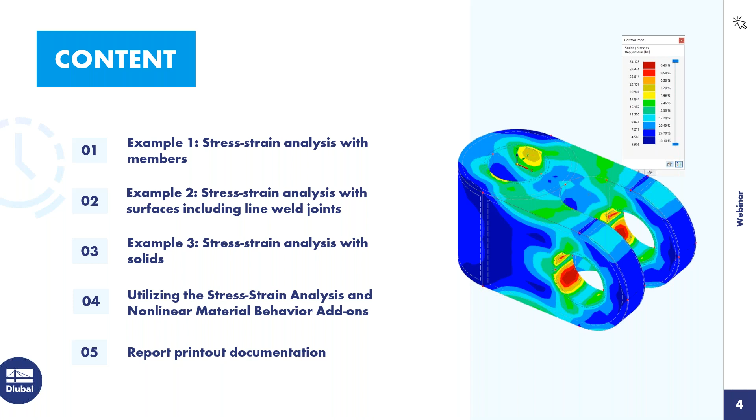Beginning within our main program RFEM here, I've already created the first model, and you'll notice I gave it a model name. The type of model is set to 3D, and under the add-ons, this is where we want to activate the stress strain analysis add-on. These are all the multiple add-ons that we could purchase with our RFEM license, so we'll be starting with this one for today.

Once we've activated that, we can see our 1D member elements modeled here in our graphical window. If I turn this into wireframe view, these are all going to be one-dimensional elements, and this is some type of facade wall.

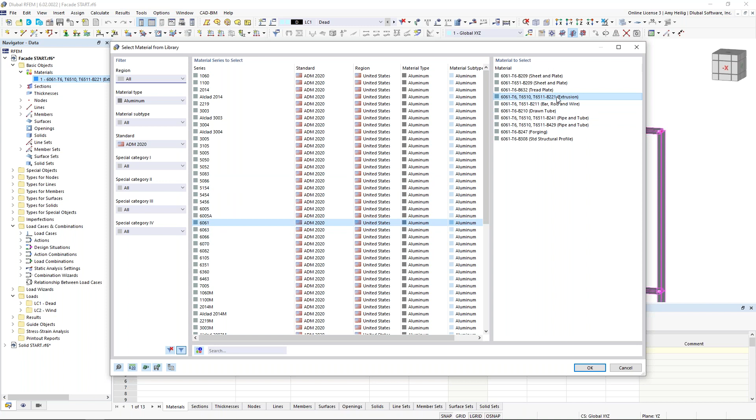I have defined the material here for all of these members as 6061 T6, and this comes directly from the ADM standard. If we take a look at our material database, notice I use my filters on the left to filter to the ADM, and under the 6061 category, I chose this particular material for extrusions.

If we take a look at the cross sections defined within this model, we have a couple of them here. These are just basic parametric sections where I could input the dimensions, and the program will automatically calculate the cross-section values for me. Same concept for this second cross-section, notice I just rotated it 90 degrees here.

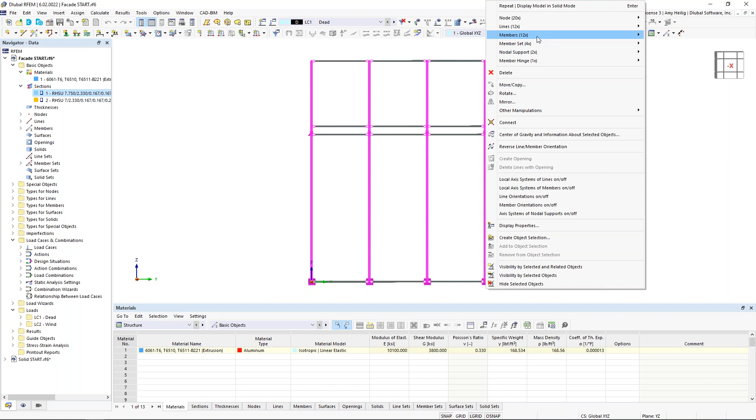So I have modeled all of these members, and the program has gone ahead and broken some of these apart here. Perhaps we'd like to design these columns as one continuous member. Even though those members are broken apart, it's not a problem, as we can create what's called member sets. If we highlight all of these single elements here, and we'd really like to design them as one continuous member, we can always right click, and under the member option, we have what's called create member set.

The program will automatically group all of those together, and now we see them available in our navigator on the left. I also want to go back to our base data here by right-clicking on the model name, and under the settings and options, I'm going to turn on the member representative and the member set representative. Notice we have a couple additional tabs up here at the top.

What the program can do is group together members that have similar materials, cross-sections, lengths, as well as several other options. Once we activate these member representatives, we also see them available over here on the left-hand side. If I turn this into wireframe view, we'll also see those red and blue symbols here, kind of grouping those similar members together.

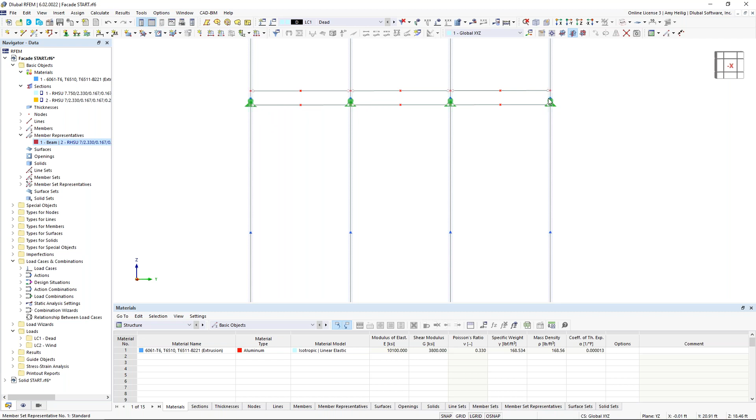This will come into play later on with our stress design. I've also applied a couple of supports here. You'll notice the nodal supports applied at the center line of these small segments, and then we have a sliding nodal support down here at the bottom.

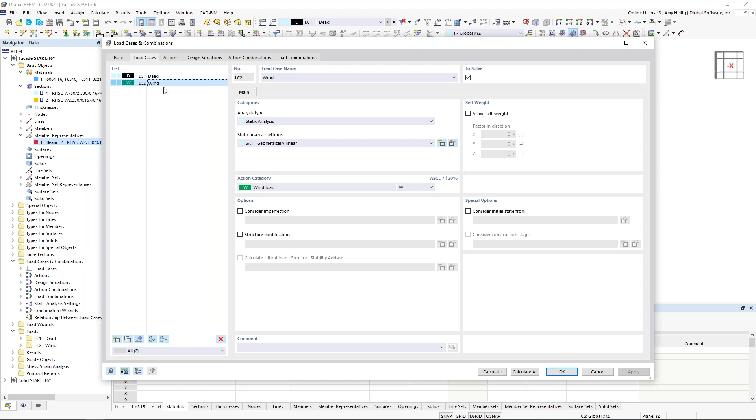Now moving on to the loads. I have created two basic load cases for our facade wall here: a basic dead load, with self-weight active, and a wind load case. Once those load cases are created within this dialog box, we would apply the loads to the structure. For the sake of time, I went ahead and did that.

If we turn on our loads for dead load, you can see that this facade wall is likely going to be supporting some type of glass panel. So I wanted to attach the glass panel and represent them as basic point loads along these horizontal members. If we double click on these loads, you'll see we can set the load type to force, but the load distribution is set to concentrated, where I can set the number of point loads along the member length. I set the magnitude here at -0.8 kips.

In the global Z direction, we have 2 point loads along the member length set at a distance of 10% of the member length, then an additional 80% of the member length. Not only that, but with these glass panels that we're trying to represent, perhaps they're not necessarily applied right at the center of these members.

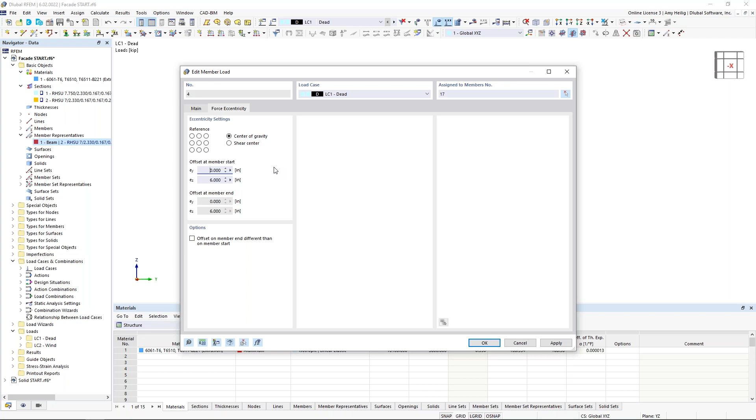So we have the ability here to turn on the eccentricity of these point loads, and now we get an additional tab where we can apply an eccentricity. I've set this to 6 inches in the local Z direction of the member based off the center of gravity, so now we have an additional torsional moment applied to these members based on these glass panels being attached there. You can also modify this to the shear center as well.

I've applied these point loads not only to the bottom horizontal members, but you can see them applied up here, to the upper members as well.

Moving on to the wind load, we can see that wind load generated here as a lateral load, and I took advantage of our load wizard over here in the project navigator, what's called the member loads from area load. If we take a look at this applied load, I've set the load direction in the global X direction based on the global axes. The load magnitude is set at 0.02 kips per square foot.

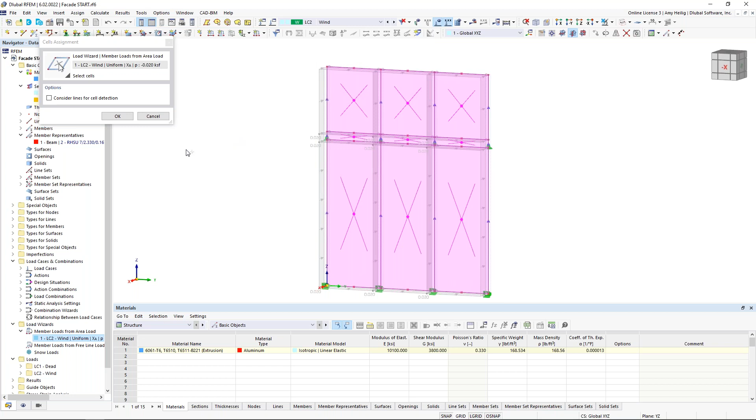Under the second tab, we have two options: either we could use the ability to select the corner points of the area load, or we can select the cells graphically, so the program can detect these closed cells between members. We can graphically select them with our selection options, and when we do this, all of those cells are automatically populated within this table. So what we'll see here is that applied lateral area load based on a closed area for these members, shown graphically.

We can always right click on this load to display separately. Essentially this is going to be the member loads that are applied based on the tributary area of each one of these members. But we can always right click here to uncheck this display separately, for a little bit of a cleaner look there.

Now that the loads have been applied to the structure, let's go back into our load cases and combinations, and we're going to back up a step under this base data. So currently I'm generating the load combinations automatically according to the ASCE 7, but you can see here we can select the NBC, Eurocode, and many other international standards. When this option is checked, those load combinations will be automatically generated according to the standard.

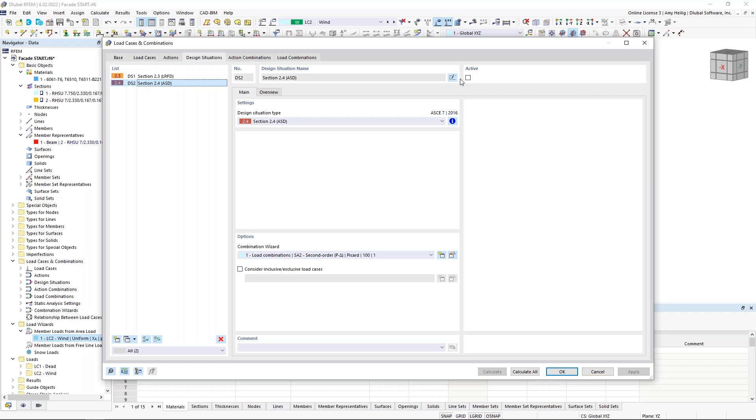The design situations are really important. We have two design situations automatically created: LRFD for our factored load combinations and ASD for our unfactored load combinations. Notice we activate these design situations for the add-ons. The add-on that we turn on, remember, was the stress strain analysis, so we'll be using this design situation once we get into that add-on for the design portion. Now, if I'm not so interested in my unfactored load combinations, let's say serviceability is not really a concern, we can delete this design situation, or we can simply deactivate it up here in the upper right-hand corner.

And under the last tab, the load combinations, this is where we see the load combinations individually listed out based on the ASCE 7, and only according to the load cases we have defined, that dead load and that wind load.

So now that the load combinations as well as the design situations are set, what we would like to move on to is the stress strain design configuration.

So we're technically ready to run the analysis, but the huge advantage of RFEM 6 is the integration of these design add-ons so that we can run one continuous workflow.

So what I'd like to do is right click on my folder here to collapse all these folders, so maybe it's not so overwhelming. And because we have activated that stress strain analysis add-on, we now see an additional folder over here on the left. Included in this list is what's called the member configurations.

So we'll double click on this to take a look at the default options. Notice that these are all of the available stresses that we can calculate for these members, and that includes normal stresses based on axial loads, based on bending loads. The list is rather long, but we've taken the liberty here to suggest a few of these stresses that you might be most interested in.

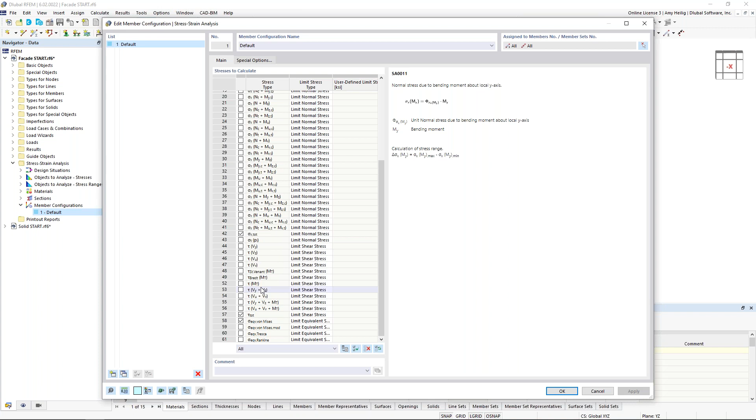For our example today, let us assume that we really are only interested in designing the von Mises stresses. So when I take a look at this, I make sure my checkbox is on, and notice for all these stresses, the equations along with the variables are listed over here on the right. And in the second column here is where we set the limit stress type.

Now currently it's set to the limit equivalent stress. What this means is the program is going to refer to that ADM material to determine what the limiting stress value is. Now, alternatively, we can set this to user defined, and I can simply type in the user defined limit in this third column. But let us go ahead and leave this for now set at the limit equivalent stress.

The other nice thing about these configurations is that we can give this one a name. We'll call it von Mises. We don't necessarily have to apply the same configuration to every single member in the model. So if I'm interested in applying the von Mises here only to my vertical members, I can graphically select them here, and once I click OK, we'll see those members populated in the upper right-hand corner.

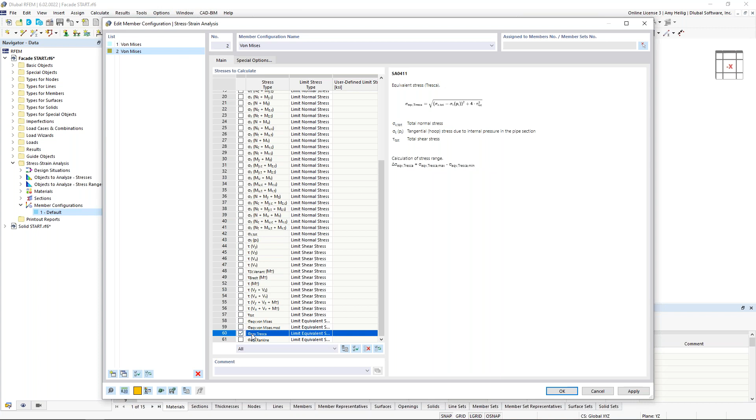Now I can make a copy of this configuration, and instead of von Mises, let us turn on the equivalent stresses based on the Tresca hypothesis theory. We see the relevant equation here that will be used. We can give this one a name, called Tresca, and we're going to assign it to all of our horizontal members. So we can select these members one by one here using our selection box, and once we're done with this, we click OK and we see the members populated in the upper right-hand corner.

So we are now ready to run our calculation. We can go to calculate, calculate all. The program will generate the mesh, it will move through the load cases and combinations for the static analysis, and then it will move through the stress design.

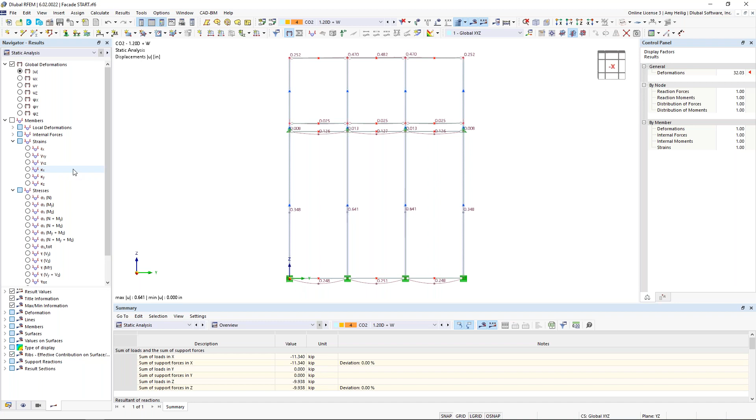Once this calculation is done running, you'll notice that we can view any one of these load combinations, for example, from our drop-down menu. Over on the left, we have both the static analysis and the stress strain analysis. So if we start off with the static analysis, we can view information like our global deformations, our support reactions, but of course we're interested in here all of the available stresses as well. We can view these stresses on the member, including normal stresses, shear stresses, and of course the von Mises stresses. So again, this is the static portion of the analysis.

But we're also interested in the stress design based on those configurations that we've just set. So what we can do here is jump to the stress strain analysis within this dropdown. And if we take a look at our table results, you'll notice that we actually get an error for each one of these stress ratios. It just simply says non-designable.

So we'd like to take a look at this in a little bit more detail, and I'm going to go into my result details here. This is going to give me a little bit more information. It tells me no limiting stress defined, please correct in the member configurations. Well, if we refer back to our aluminum material, and I'll visit this here under the basic objects, the materials, we take a look.

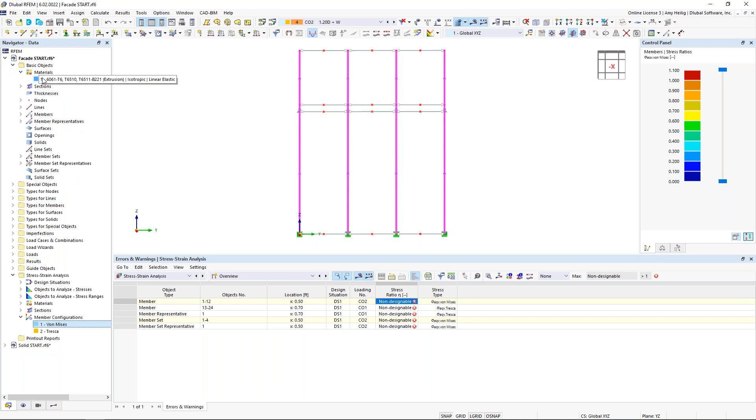You'll notice that the material values have many different values set here under the strengths, depending on if the member is in tension, compression, or shear, and so on. Aluminum materials are a little bit different than, say, steel. A36, for example, has a very clear yield strength of 36 KSI, but aluminum ADM materials do not, so the program simply doesn't know which one of these to refer to.

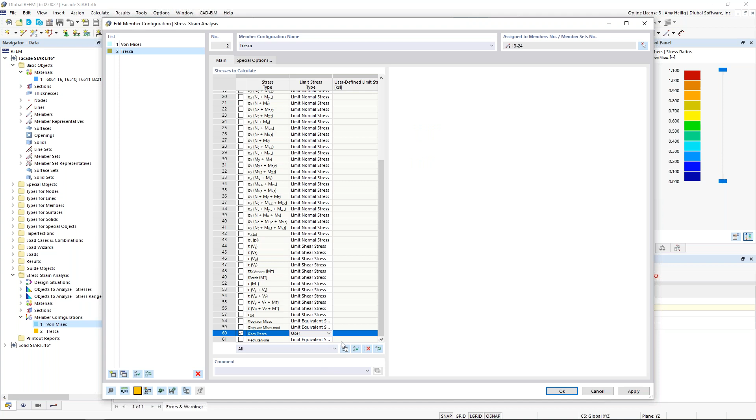We can easily fix that here by going back to our member configurations. Under our von Mises configuration, instead of using the limit equivalent stress, perhaps we set this to user defined instead, and we pick one of those strength values for that ADM material, such as 35 KSI. Under the Tresca, we need to do the same thing, so we'll set this to user defined and also set this to 35 KSI. We click OK.

If we revisit here our stress strain analysis, we see our input data and the design situation. Remember that LRFD design situation, and we're designing all of our members. So our static analysis remains the same here, but we do need to rerun the design portion according to this add-on.

So we'll go ahead and initiate that, and now we should see some results available in our table format. We can take a look within this dropdown at the stresses on members. Sure enough, we have our column here of existing stresses for each of these members, but we also have the limiting stress of that 35 KSI, and ultimately we're getting a stress design ratio.

We also can view these stresses by member set. Remember those continuous members that we created for these vertical columns - we're also going to see our stress design ratios for each one of these continuous members. If you also remember, we activated the member representative, and we're only getting one value here. We can think of this more so as an envelope solution, grouping together all of those horizontal members, giving one value here for the existing stress, the limiting stress, and the stress design ratio. Same concept for the member set representatives.

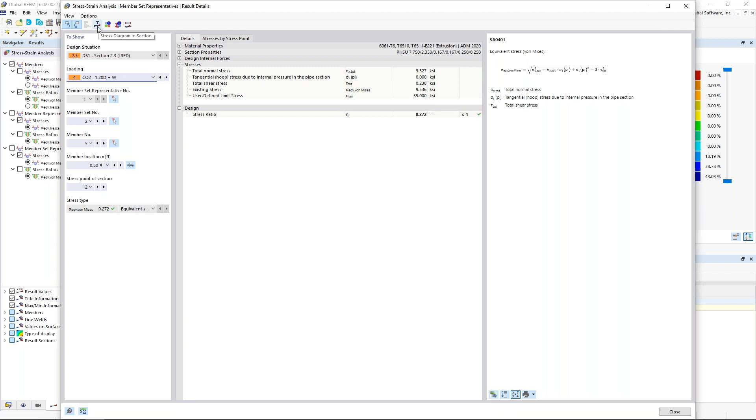The other thing we can view for any one of these results in our table format is to take a look back at these result details. If you remember, this is where we got more information about our error message, but now that it solves, what we actually see is the stress ratio. We see that same equation given to us on how we're going to calculate, for example, the von Mises stresses. We see all of our variables given. And what else is nice within these details is we can turn on the stress diagram within this section.

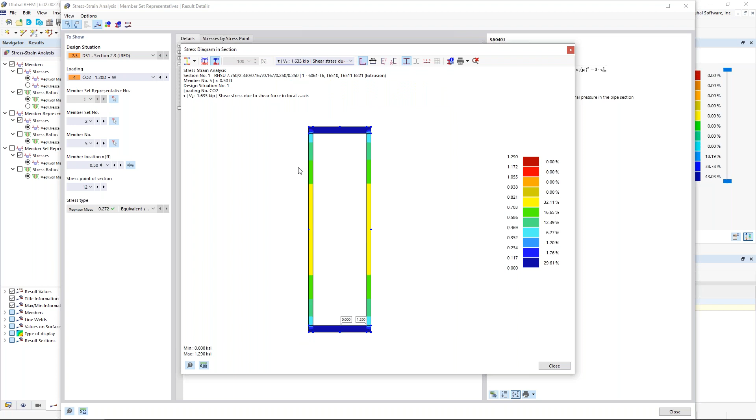So currently we're looking at that cross section at the location of x equals 0.5 feet along the member length, and we're currently viewing those von Mises stresses graphically here, but we can use the dropdown to choose the third option, stresses, as well. The stresses option is going to allow me to view all of the normal stresses. Perhaps I want to take a look at the shear stresses. We can add this information to our printout report and just get a little bit more information about what's going on for this particular section at this X location.

Now, of course, in addition to the table format, we have all of our information shown graphically here under the stress strain analysis. For example, we can view the stress design ratios that are currently turned on according to Tresca, or perhaps we want to turn on the stress ratios according to the von Mises.

Okay, so that will wrap up this first example with one-dimensional members. For our second example, I'm actually going to create a new file because we will model this one from scratch. Pretty basic structure, so we'll give this the model name of base plate, whatever that may be, and the type of model will be set to 3D. Under the add-ons, again, we want to activate the stress strain analysis, and we're also going to activate for this second example the nonlinear material behavior.

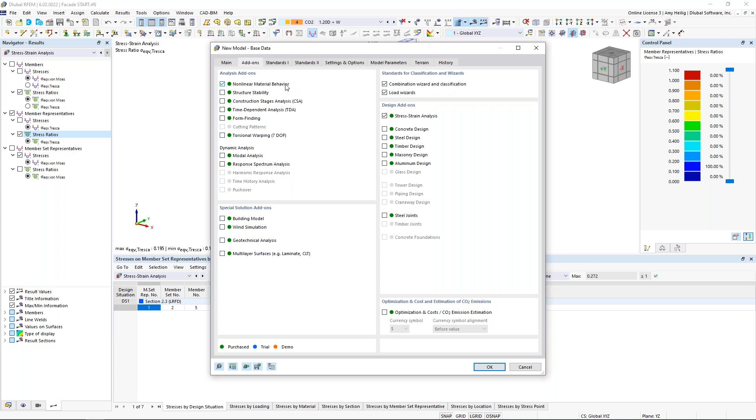So we'll get into this a little bit later on, and we can click OK. Now we're presented with a brand new model here within RFEM.

The first thing I'd like to do is right click on my grid settings down at the bottom. Currently everything is based on a spacing of 1 foot, so I'm going to go into my units and change the length unit from feet to inches, since we're working at a much smaller scale. I click OK, and instead of grid point spacing at every 12 inches, I'll set this to every 1 inch, then click OK.

So we zoom in here, and now we see our much smaller drawing grid. We'll begin by drawing a new surface within our toolbar up here, and we'll choose rectangle via center.

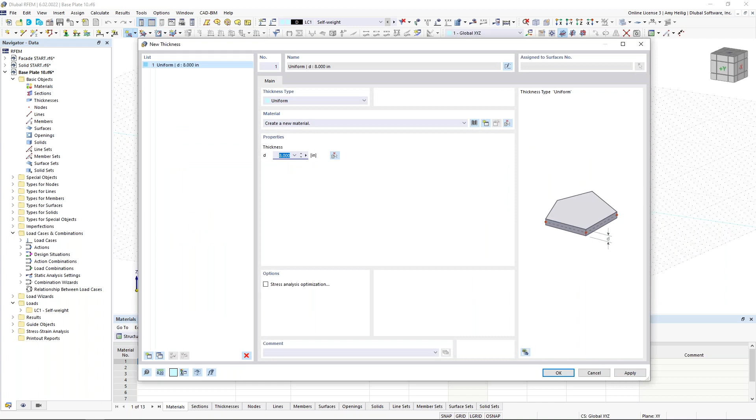We need to generate a new thickness and material for this surface, so we create a new definition type here. The thickness is going to be set at 0.5 inches, and we need to create a new material from our material database. We can use our filters on the left to choose steel, the AISC 360 for example, and choose A36 for plates. Now that this thickness and material have been defined, I can click OK through these dialog boxes.

I will snap at the origin here, and make my second click at a point of 10 inches in both the X and Y directions, and we have our first 2D surface element generated here.

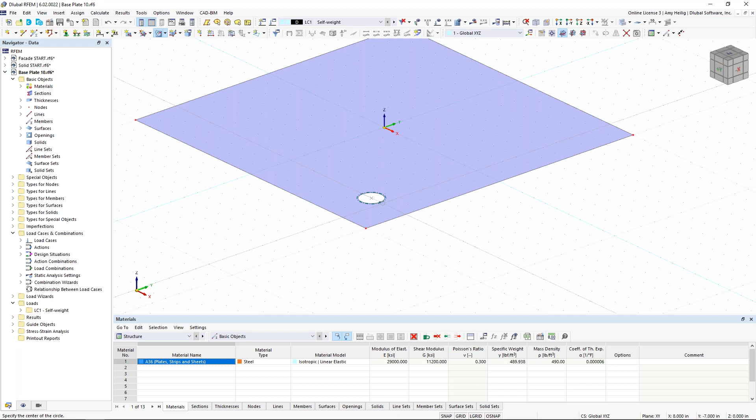Now I'd like to add in some openings. This will essentially be our base plate, and we add the openings to represent where those bolts will connect the base plate to the underside of the surface. We can do this by creating a new opening and choosing the circle option, then simply clicking directly on my drawing grid and setting my radius by typing it in, such as 0.75 inches. I hit enter, and now we see that opening generated here on the surface.

I'm going to represent my bolt elements with a new nodal support, so I create a node by directly clicking right at the center of that opening. I right click to exit, and we're going to create a new nodal support, generating a new nodal support definition here as well. I'd like to restrain translation in the global X, Y, and Z directions, but release rotation about those global X, Y, Z axes. So this pin nodal support is going to represent that bolt taking over the tension forces. I click OK once again.

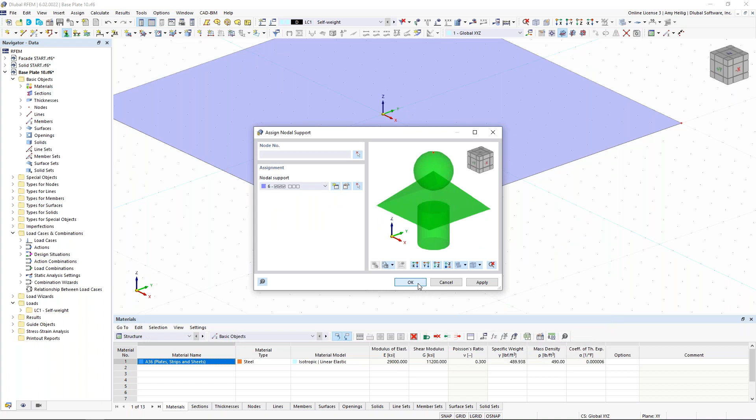I'll snap here to that newly generated node, right click, and we can even right click on the display of this nodal support to decrease its size to something much smaller, so it fits in with the size of our base plate here.

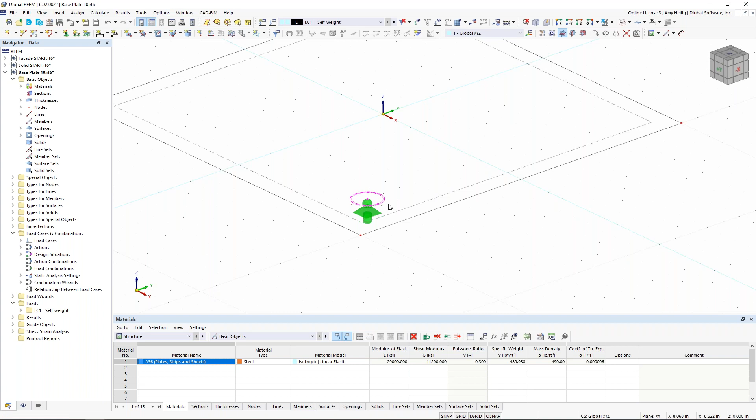I'll convert this to wireframe view and highlight all of these elements that I just generated. What I want to do here is make a copy of the opening and the nodal support, so we'll go to our rotate copy tool. We'll create 3 copies, rotated 90 degrees about the origin. We click OK, and now we can see the rest of those openings and nodal supports generated here.

Now, the problem is that none of these nodal supports are currently connected to the base plate, because they're sitting in the middle of these openings. But it's not a problem, because we can choose the option to create a new surface by selecting the boundary lines. Instead of the stiffness type being set to standard, we choose the rigid option, so we'll fill in those openings with a rigid surface. Notice I don't set a thickness or a material, simply because the stiffness is really, really high for this particular stiffness type. So when I click OK, I can simply click around these openings here to essentially connect that nodal support back to the base plate.

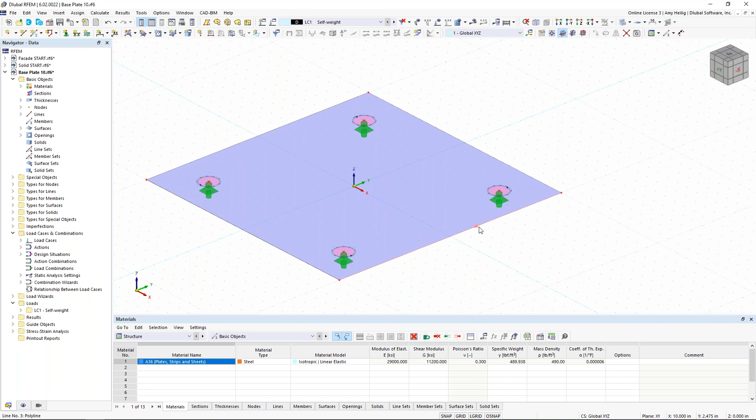Now we'd like to move on to modeling the column element. There are many different ways to do this, but I'd like to show you a quick trick we have in the program. I'm going to modify my drawing grid in the vertical direction, which we can see clearly in the graphical window, and create a new single member, exactly like what we saw in the previous example. It's a one-dimensional element, and under the section we create a new cross section.

Instead of one of these parametric sections, I'll take advantage of a standardized section, which allows me to use my filters, similar to our materials, over on the left-hand side. I can filter, for example, to AISC 15, choose a W shape, and scroll to the bottom where all the shapes are listed to choose a W8 by 35.

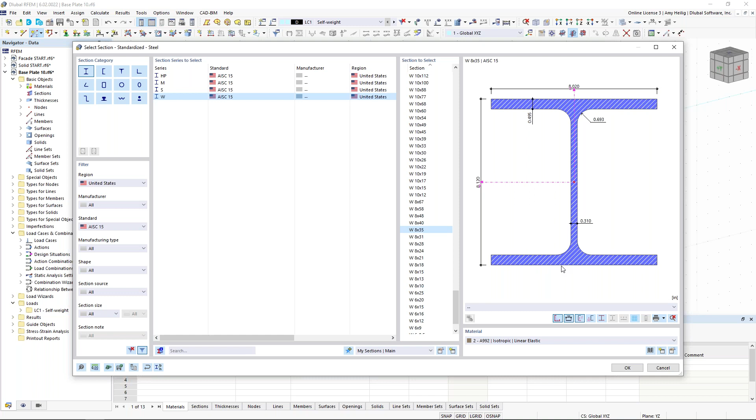Now we also need to generate a new material, so we access our material database using our filters on the left, and this time choose A992. Click OK, and that new material is associated with this W8 by 35. I click OK, snap at the origin, and my second point is up here at 40 inches in the vertical direction. Now we have our column generated.

But the problem is when I turn this to wireframe view, this member is just a one-dimensional element modeled at the centroid. We want to convert this to 2D surfaces so we can do an in-depth stress analysis and design. What we have in the program is the ability to right-click on this member, and under the members menu, generate the surfaces from that W8 by 35.

Notice everything was converted to those 2D surfaces. The flanges, the web, everything from that W8 by 35 was converted into these surface elements, including the thickness as well as the material, so we don't need to make any modifications, assuming we still want that same cross section.

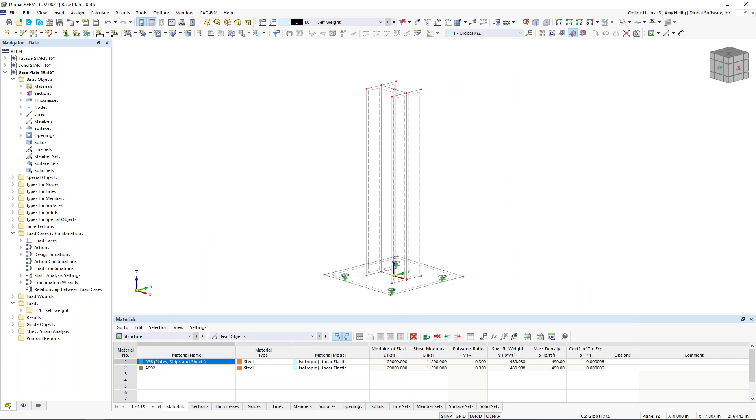Now that we've modeled this column, we need to apply a surface support down here at the bottom. With downward deflection, this base plate is going to bear on some other surface that we didn't model today. But in uplift, we want that surface support to fail, and instead we'd expect our bolts, represented here with nodal supports, to take over those tension forces.

So we create a new surface support within our tools, and create a new definition type. We'll go ahead and restrain the shear based on the local XZ and YZ axes of this surface. For my vertical translation, based on the local Z axis, I'm going to set a spring constant of 1e6. It's really recommended in almost all cases with a surface support not to fully fix it in the vertical direction - we get better convergence in the calculation when we set a spring constant instead.

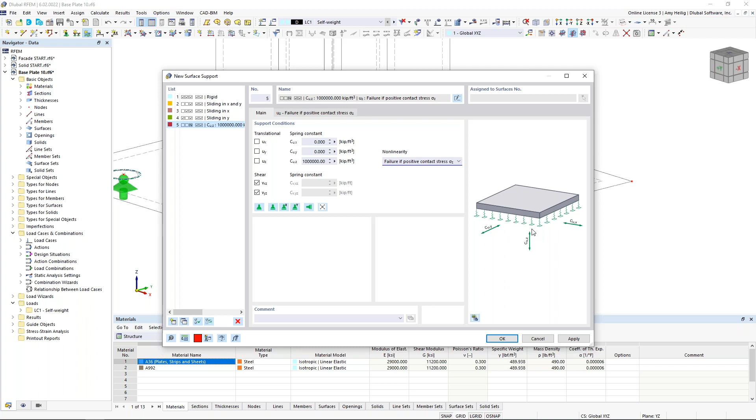And of course we want to take advantage of this nonlinearity. RFEM is a nonlinear analysis program, and all of the geometric nonlinearities are automatically included within the base program. This is where we can set failure if positive contact stress occurs in the vertical direction, so with uplift we should see that support completely fail, but in downward deflection that support will be engaged again. We click OK, snap on that base plate, and see that surface support applied there.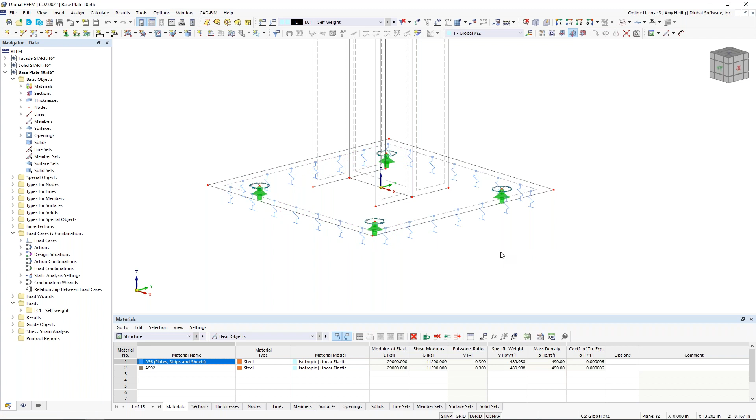Similar to the nodal supports, we can right-click and use our slider to decrease the size of this, and we can also increase or decrease the number of elements we're seeing here, depending on what we see fit for our model. All right, so essentially the modeling portion is complete.

Let us touch on the FE mesh. If I go to calculate, generate mesh, what you'll see is that the mesh is entirely too big. We're getting very few mesh points, which in turn is not going to be an accurate analysis, so it's very clear we need to refine this FE mesh.

Going to calculate, we have mesh settings. Instead of the default 1 foot or 12 inches for the target length, we can set this to something much smaller, such as 1 inch. I click OK and apply, the program generates that FE mesh, and we can say this looks much better. But if I zoom in on these openings, I really only have 4 mesh points around the circumference.

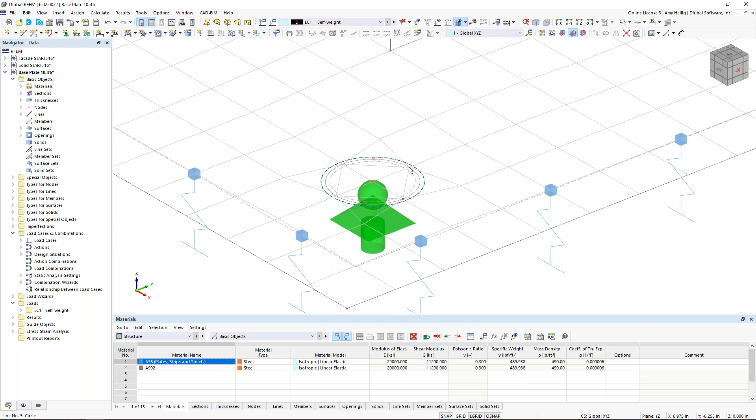So perhaps we want to refine the mesh a bit more around these openings. I can hold down my control key here to select all 4 of these nodes. I'll double click, and we have the ability to activate the mesh refinement under these particular node numbers. Now we get a new tab where I can create a new nodal mesh refinement, and we can set the radius of this nodal mesh refinement to 3 inches. The inner target length will be 0.1 inches, but we'll transition back to those global settings of 1 inch. I click OK, I click OK once again, and now we see that FE mesh refinement symbol shown graphically here within the model.

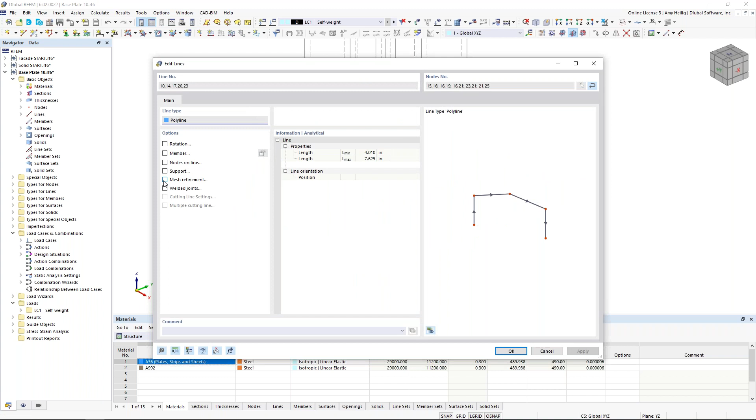Perhaps we'd like to do the same thing at the base of the column and refine the mesh a little bit further around these lines. I hold down my control key to select all of them, double click to edit the line, and in a similar manner to our nodes, we can activate the mesh refinement for these particular lines. Under the mesh refinement, we create a new definition, and we're going to set the target length to something like 0.2 inches. I click OK. Then we can finally go to calculate, generate FE mesh, and we'll see here a much more refined FE mesh at the base of the column as well as around those openings.

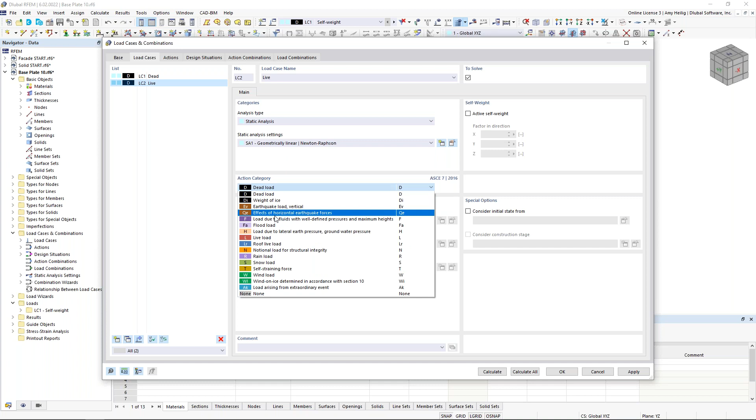So everything seems to be good to go now. Moving on to loading, essentially what I would like to do is to visit my load cases and combinations here. We have a default load case that's always created called self-weight. Let's go ahead and rename this one to dead load, and we can leave the self-weight active here. I'll create a second load case for our very simple example today that will be live load with the action category of live load. So now that these two load cases are generated, what we'd like to do is actually apply the loads to the structure.

The loads are going to be applied as a point load at the top of this column. But the problem is if we apply a point load as the model is now, we're going to get a singularity because that load isn't going to be distributed over the entire face for the top of this column. Well, we can fix this by drawing a new surface yet again, and the type will be rectangle, and we're going to set the stiffness type to rigid, same as we used at the openings where our bolts are located. I click OK, click once on the left of the structure and a second time on the right of the structure. If we turn this to a rendered view, we can see that rigid surface shown here.

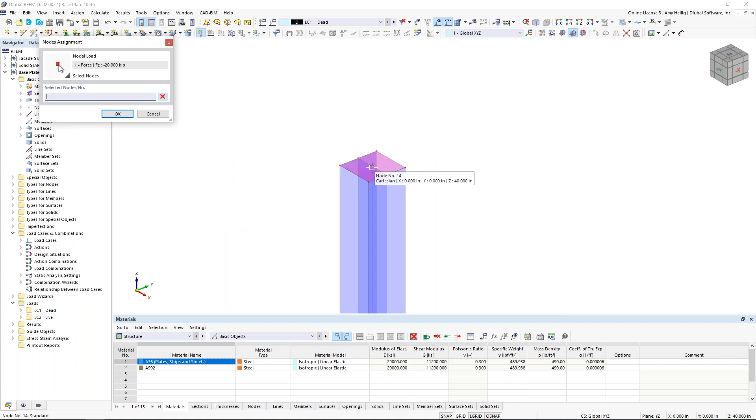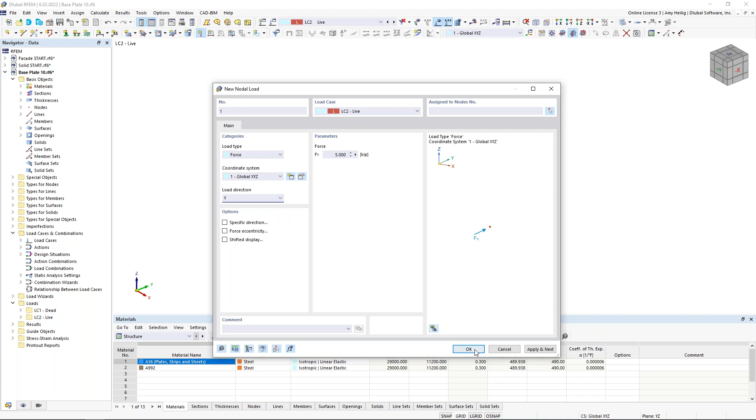So now I can create my first point load by activating a new nodal load. I get my dialog box where I can change my load case to dead load, and I set the force as -20 kips in the global Z direction, graphically choosing which node to apply here, node number 14. If I hit apply and next, the program will automatically apply that load in the background, but I'm still within the same dialog box so I can use my dropdown to choose live load, modify this magnitude to 5 kips in the global Y direction. I click OK, select this node, click OK once again, and we see that lateral load applied here.

Going back to dead load and live load, both of those loads should be sufficient. Going back into our load cases and combinations, we've created these load cases, but we want to combine them into a load combination, and we also need to check out our design situations. So back under the base data, if we're thinking we'd rather manually create those load combinations instead, all we need to do is simply turn off the combination wizard, and notice a few of those tabs disappeared here at the top. So this gives me the ability to still create these design situations, which were automatically generated based on the ASCE 7. But perhaps I'm not interested in my ASD design situation, so I can completely delete it. I can even take this design situation here and rename it if I'd like.

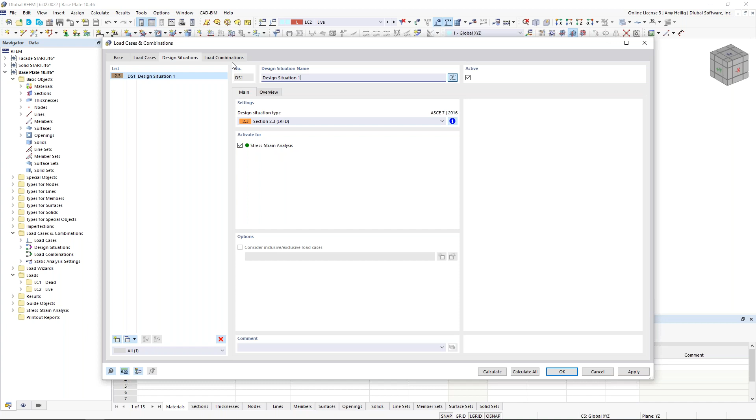So we'll call this design situation 1. Maybe it's a little more code independent, but it's still active for this stress strain analysis. Remember, we have to have a design situation that all of the load combinations are placed under for these add-ons. So looking at our load combinations tab, it's empty because we need to manually create these. I'll generate a new load combination here.

Perhaps we change the static analysis settings to linear first order rather than second order. Under the assignment, we can select both dead load and live load. We could adjust the load factors if we'd like, but we'll go ahead and leave this as a simple 1.0 dead plus 1.0 live. We click OK, and now we should see that load combination available to us along with both of those loads.

That's being applied here graphically. All right, so let us talk about those stress strain configurations. Remember, because we have activated the stress strain analysis, we have this folder available to us over on the left-hand side. I can right click here to collapse all of those again so it's not as overwhelming. And the first thing I'd like to do is right click on these settings for the stress strain analysis.

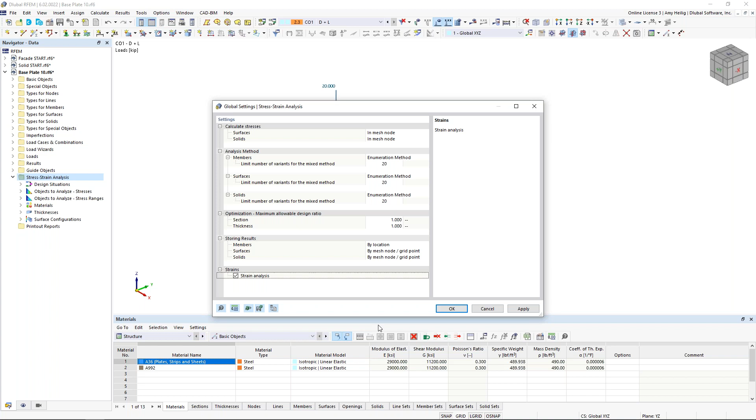Now, by default, in order to design the strain, it's actually turned off. We'll still get the strain analysis results in the static analysis portion, but as far as the design within this add-on, we can activate it here with the strain analysis. So we'll see how that looks a bit different from our previous example.

I click OK. So now instead of member configurations here, we have surface configurations because we have only 2D elements within this model. So I take a look at my configuration details, and this list should be a little bit different than what we saw with our members. So we see all of the available stresses we can calculate, the relevant formulas over here on the right-hand side.

And again, we've taken the liberty to check on a few of those that we think you'd be most interested in. But for us, what I'd like to do today is to only activate the von Mises max. And we see the equation given here, just to keep it simple for this particular example.

Now, the limit equivalent stress that it's going to refer to, this should not be the same problem that we had with the ADM material. We know with A36 material, with A992, we only have one yield strength. So that should be fine for this example.

Notice under these strains, we have all of the available strains that we can go ahead and design as well. Now I'm going to turn most of these off. We'll only activate the von Mises strain. Notice you can set here the plastic strain limit.

So this strain limit is only applicable when we're actually doing a plastic nonlinear material design, which we will be in just a minute, but just know that the second column is only available for that nonlinear analysis, not for the linear analysis, which is what we're currently under.

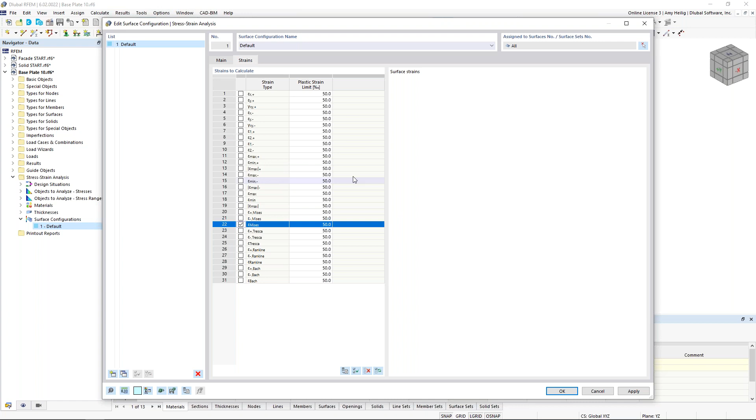So this is going to be assigned to all of the surfaces. I click OK. If we want to take a look at here within our dropdown, the stress strain analysis input data, remember we have our single design situation here. The objects to analyze, all of my surfaces are turned on.

We also can turn on what's called the stress ranges, so we activate this for all of our surfaces. What this just means is that we'll be able to give you the minimum stress, the maximum stress, and the stress range for each one of those surfaces. And we'll see what that looks like in just a minute.

So we're now ready to run the calculation. We go to calculate, calculate all. The program generates that mesh. It will now run through the load cases and combinations for the static analysis. And then we move on to the stress strain design.

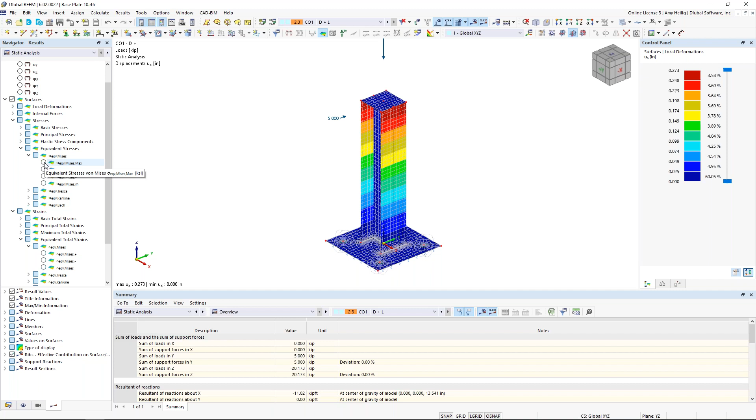So we're currently looking at our load combination, and we see here our static analysis results. We currently have the deformation turned on, but we're probably most interested here in topics like our surface stresses, and we can view the surface strains. Now, again, with the static analysis, we have everything available to us. It's just the design portion that we limited to the equivalent von Mises stresses, for example. But we can take a look here at the static analysis for those von Mises stresses.

And I scroll in here, we certainly have some high stress points. You know, these maybe could be attributed more to a singularity. But notice that the stress value here at these high peak points is 163 KSI.

There's something I'd like to discuss further that's really important when viewing our results at these very small scales for steel type connections. Under Calculate Result Smoothing, these are the various options for how we're going to smooth the results so we can present them with ISO bands or colors in our navigator. They really can affect the results and how we're viewing them depending on which setting we have set.

So what I'd like to do is go back to the PowerPoint to explain this in more detail. Notice here for my example, I have two adjacent surfaces, surface 1 and surface 2, with the dividing line right down here in the center.

The second option is non-continuous. This is where we have a varying distribution over each element, so for each FE element we might have multiple colors, but there's still a non-continuous display between adjacent elements — each element is still very independent from the one next to it. We display the corner values of each FE element at every FE mesh point for a total of 4 values, again based on those 4 FE elements surrounding that single mesh point.

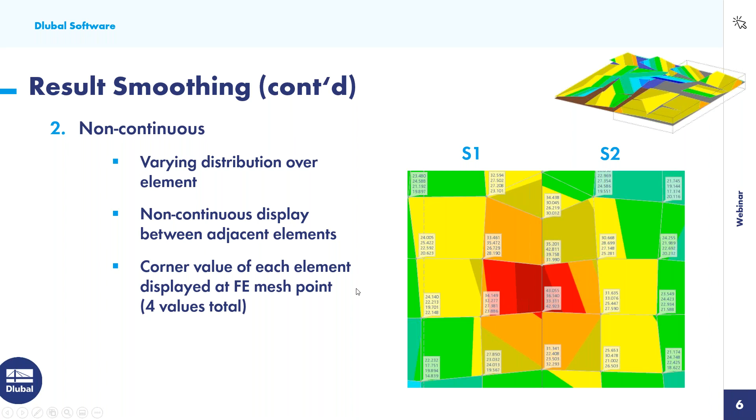The final option is continuous within all surfaces. We use that smoothing algorithm to smooth all results between all elements in the model, and there's now a continuous display between adjacent surfaces. We won't really see that boundary line between surface 1 and surface 2, and can tie all of those isobands and colors together. We'll also have 1 average value of each element displayed at the FE mesh point, so now only 1 value is given here.

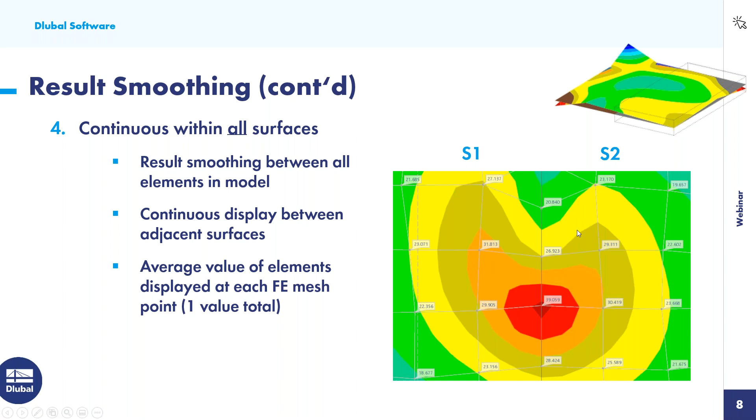So let's go back to our example to see how this really affects our results and if it makes that much of a difference. The default option here is continuous within surfaces, and our von Mises stress is 163 KSI. I'm now going to modify this to constant on mesh elements — I click OK, and remember that's the first option we covered in the PowerPoint, where each FE mesh element has its own average value. Notice my von Mises stress is now 90 KSI. It was significantly reduced because we're no longer trying to tie all of those stresses together within a single surface. This is why it can really impact how we're viewing our results.

So now that we have changed this, notice I didn't need to rerun the static analysis. It's just really how our results are presented to us.

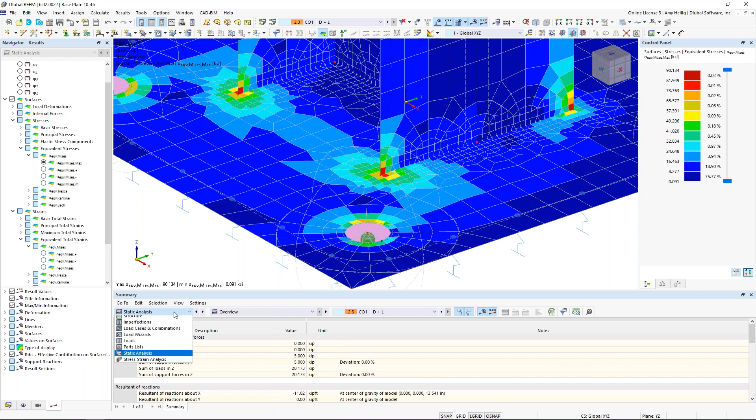But what I would like to do is go to the stress strain analysis here, and we do need to rerun this calculation. The program says, wait a minute, it looks like the stresses I need to compare have changed. So now we can view the stresses on the surface.

When I take a look at my existing stresses in this first column, the limiting stresses are either 36 KSI for my A36 material or 50 KSI for A992, and ultimately we're getting a stress ratio. What we see here are stress ratios that are very high, 2.06 for example. We clearly know these materials are not going to be able to take on these high stresses. They're simply going to yield before we get to this point.

So this might flag us that it's time to move on to a nonlinear material analysis instead. And it's actually quite simple to make that change within the model.

If we go back to our materials in the project navigator and look at the materials tree, in particular A36, I double click on this material, and you'll notice the default material model is isotropic linear elastic, just a simple linear material default in the program.

But if you remember, under the base data, I activated the nonlinear material behavior add-on. This add-on releases all of the nonlinear material models, and for us, we're going to take advantage of this isotropic plastic for surfaces.

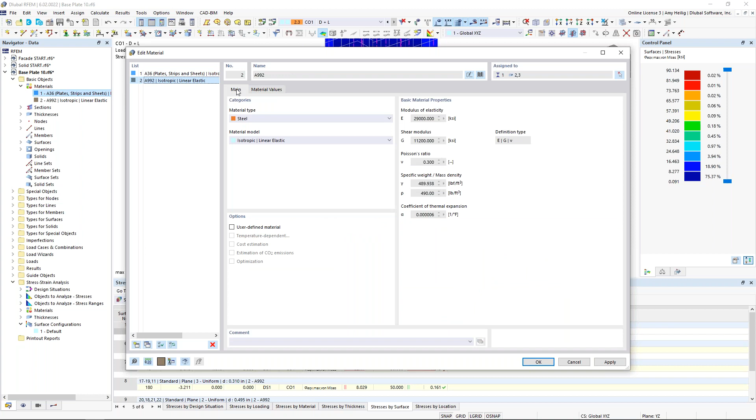Under A992, we can make that same change by changing it to isotropic plastic, and notice under our second tab, we have a yield strength here of 50 KSI.

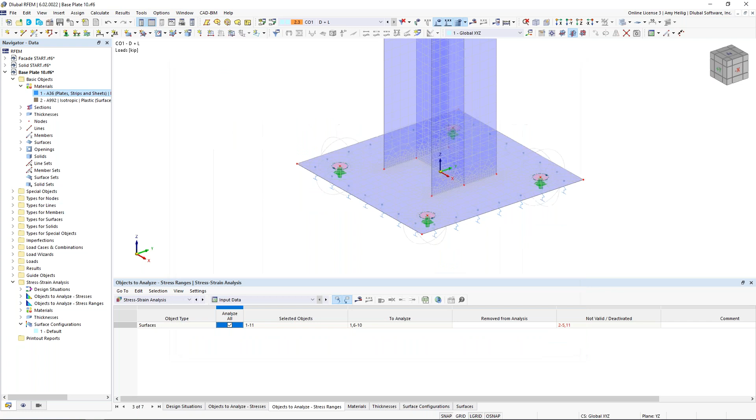So once we've made that change, all we need to do is rerun the calculation. The program goes back through the static analysis, and it also goes back through the stress strain design. You'll notice it takes just a split second longer here because we now have a nonlinear material.

Reviewing the static analysis for this load combination, we go back to our von Mises stresses, and maybe I isolate this based on our base plate here for visibility. Sure enough, I look at my highest stress and it's 35.997. So nothing is exceeding that 36 KSI.

Essentially, with this nonlinear material analysis, the program applies the load. When that FE element reaches the yield strength, the load is distributed to the adjacent elements, and it continues to do so until the load is fully distributed.

We can actually see within our static analysis the option for the criteria. So we activate the criteria, and the program will tell us exactly which elements have fully yielded.

Perhaps we go back to our von Mises stresses and show the reverse visibility here, so we're only viewing our columns. Again, the highest stress is 49.819. I should never see any of those element stresses higher than that 50 KSI.

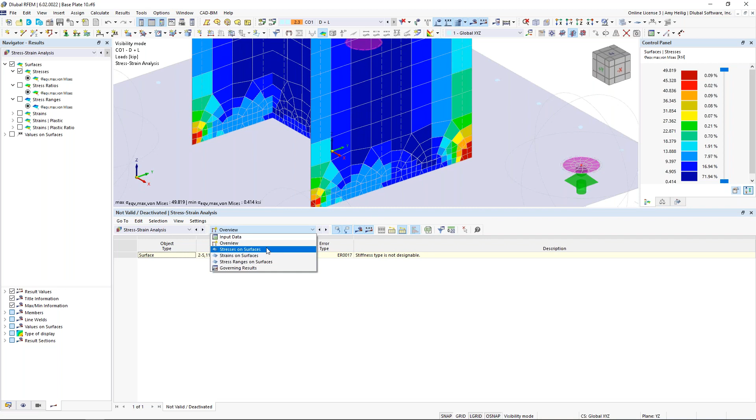So that's as far as the static analysis, but under the stress strain analysis for the actual design, we can view the stresses on the surface. I'll cancel out on my visibility so everything's visible in my table, and I would also expect not to see any stress design ratio higher than 1.0.

So within the existing stresses is this column here, the limiting stresses either 36 or 50 KSI, and here are the stress design ratios: 1.0, 0.996, 0.989, again because we're never exceeding that limiting strength.

Within these table settings, we also can view the strains on surfaces. Remember, we activated that, so we see the existing strains, but we also have that limit we input that's only applicable for the nonlinear material analysis, and then we get a strain plastic design ratio here as well.

Lastly, remember the stress ranges on surfaces, I said we could activate this. We will show the minimum stress with each surface, the maximum stress, and then the total range. Everything's synced up in the background here, and we can see that red arrow showing us exactly where those high stress points are.

And of course, we can view everything graphically here, such as our stress ranges. We can view the stress design ratios. And remember, that's because we use this drop down here for the stress strain analysis, which encompasses the nonlinear material analysis.

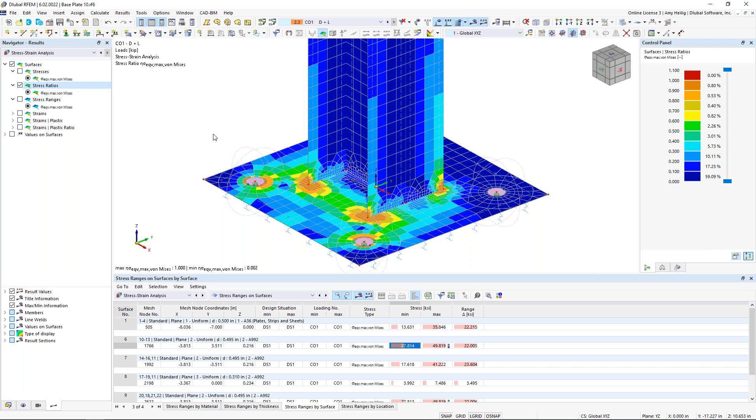The final thing I want to cover with this particular model is a new feature within RFEM 6. So I'll go ahead and turn off my results here. I'm also going to turn off my FE mesh, so this is a little bit more visible.

We want to take advantage under this option, folder option types for lines, of the new feature: line welded joints. This is really a post-processing tool that we can use to do the weld design. We're not modeling in the welds for the analysis, but rather we can take advantage of the program calculating the stress flow between surfaces, and we can set our weld joint here and give it the input data. We can also set the limiting stress value to actually get a design ratio for these welds. So let us take a look at what this encompasses.

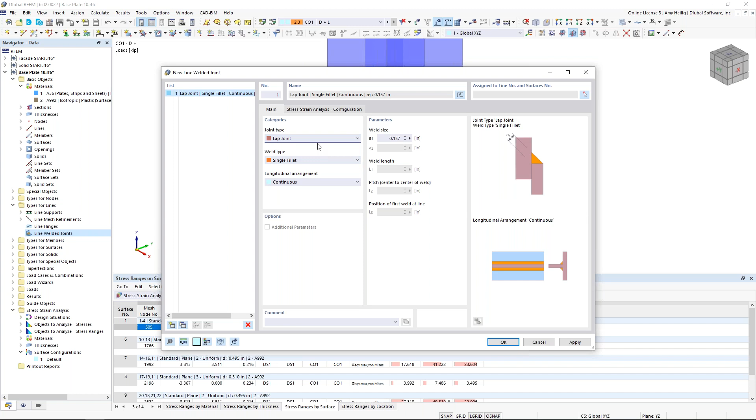So we activate this line welded joints and we have our first definition type here. The first joint type is a butt joint, but we also have a corner joint. Notice this picture updates over here on the right. We have a lap joint, and finally we have a T-joint, which is what we'll be utilizing today based on a double fillet.

So what we will do is to specify the weld size. Perhaps I set this at 0.167 inches, and then I can graphically assign this weld to a line in my model. We'll begin with the web that is going to be welded onto the base plate. Then I need to select my surfaces. I first choose this vertical surface, then my second click is going to be the surface that it's being welded to, so the order that you choose these surfaces does matter. We'll go ahead and choose surface number 8, then 1, and we click OK.

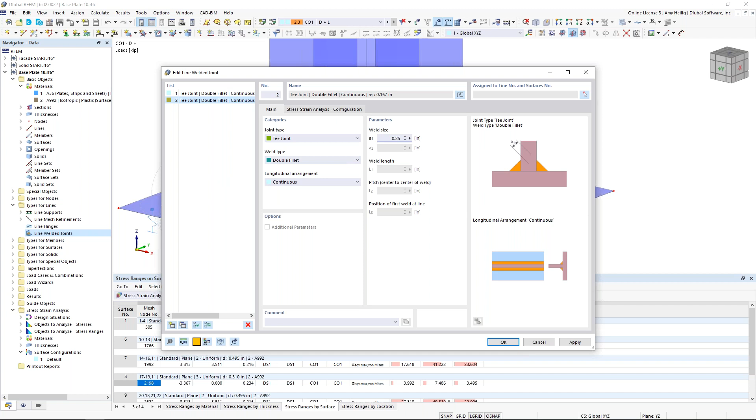Well, I can make a copy of this line welded joint, and what I'd like to do here is modify the weld size to something slightly larger, 0.25 inches. Then I'm going to choose my line of my upper left flange. I choose my vertical surface first, my horizontal surface second, but I can remain within this dialog box to add a new object. Now I can rotate this around here.

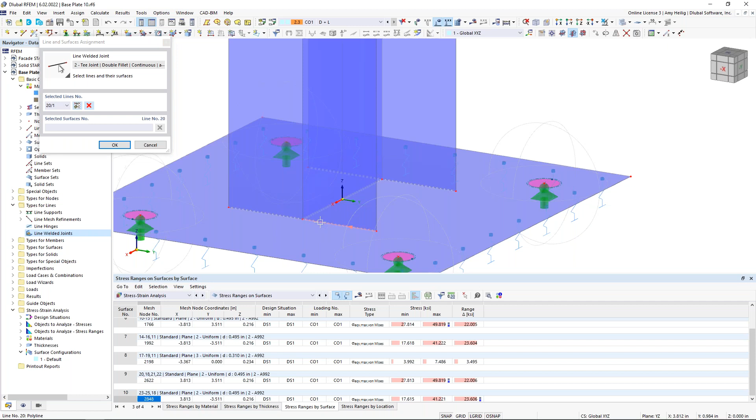I can choose my second line weld joint. I choose my vertical surface, my horizontal surface. I once again add a new object to choose the lower left flange this time, my vertical surface, and then my horizontal surface. And one more time, I create a new object by selecting my right flange with my vertical surface and my horizontal surface, and I click OK.

So now we see all of those lines and surfaces generated here with the relevant line welded joint definition types. Now that we have defined these line welded joints, you'll also notice within my stress strain analysis that we have a new option here called line welded joint configurations.

So if we take a look at the default settings here, once again, we have the various stresses that we can calculate based on this new weld. We have the weld throat stress due to normal loads, due to bending loads, shear loads, and so on. For this example, I'm going to activate all of these stresses here along my weld based on those various loads. I'm also going to activate the resulting weld throat stress, which is really combining all of these stresses into one to come up with that equivalent stress.

Under these special options, this is telling the program how we want to smooth those stresses along the weld in order to calculate the stress design. So we can just set this to none for right now, and all this means is that the program won't smooth those results, but perhaps we're doing a hand calculation. Maybe we'd want to change this to linear or to constant for a little bit easier comparison, as opposed to the none option here, which won't smooth over those results at all.

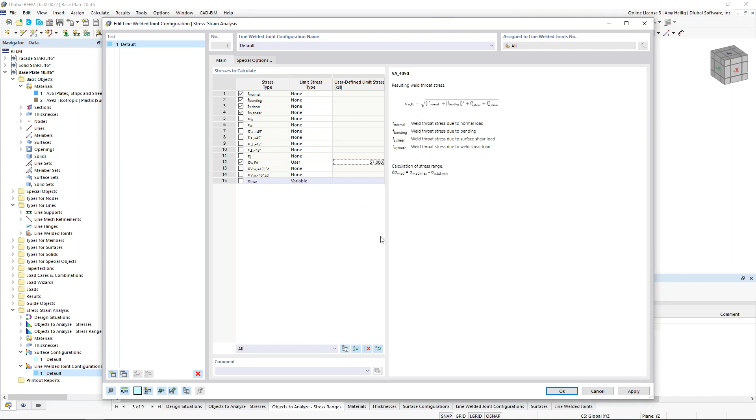Currently it's set to none, but we can use the option here, user defined, and for this equivalent stress we would input the strength of our weld. So perhaps this one's 57 KSI, for example, or whatever it may be. Now that we're done with these configurations, we click OK, and under the stress strain analysis input data, notice we have a new option to calculate the line welded joints, which is automatically turned on. We can run this calculation directly within the table. The program needs to run through this load combination, and we're still running that nonlinear material analysis, then it will run through the stress design. We've already covered the stress design of the surfaces, so rather what we'd like to do is take a look at the stresses in the line welds.

I'll turn this to wireframe view. We can zoom in here to see exactly what's happening. But we see for each one of these lines that we applied the welds, we have the existing stresses. We have our limiting stress here for that equivalent resulting weld throat stress. And then we get a stress design ratio as well.

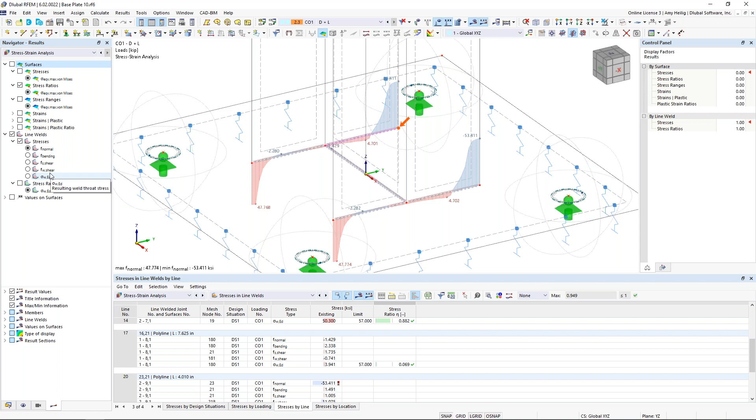We also have the options to view these graphically here, and you can see the line weld stresses. We can change the view of these. So that option to smooth over the results, this is what I was referring to. Essentially, the program can set this to a linear distribution here, constant, again, if we're maybe comparing to hand calculations. Otherwise, we won't have any smoothing going on. And of course, the stress ratios are shown here as well.

Kind of a great new feature, again, that we added within RFEM 6 that will be helpful for some of these FEA connections. All right, so we will move on to our final example today, and this one should go rather quick.

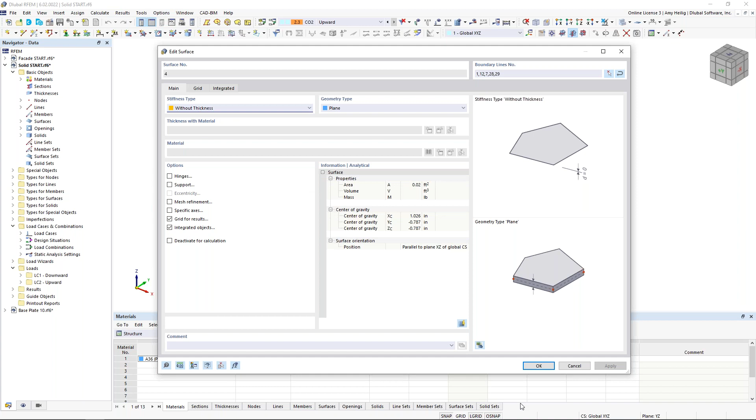This is a 3D solid. Notice that I went ahead and modeled everything here, and we have all of these available surfaces in the model. When we're modeling solids, we set the boundary surfaces to define the solid here by choosing the stiffness type without thickness. So there's no thickness, no material. We're simply using them because when we generate our solid, notice we have here the boundary surfaces. And with the solid element, we do need to give it a material. In this case, I gave it the material of A36.

So I also have a couple load combinations already generated. We have an upward load here right through the openings of this solid. We also have a downward load. So these two load combinations are going to be categorized under my design situation. And we want to right click here to visit our base data. This is where we can turn on that stress strain analysis. We click OK, and now we get that additional folder over here on the left.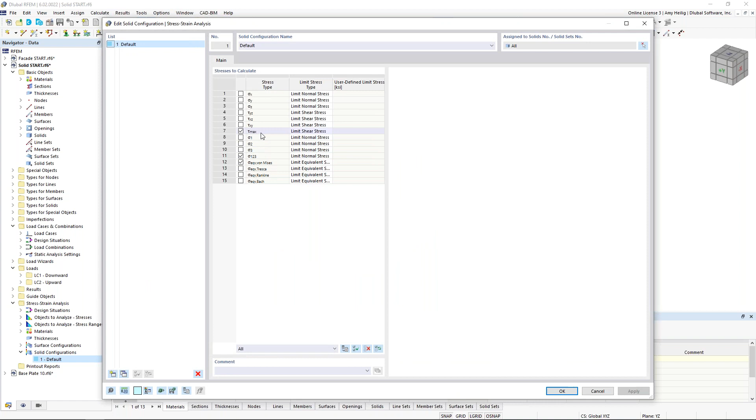Similar to what we saw previously, we now have a solid configuration. So we double click on this, and of course this list looks a little bit different because now we're working with a 3D element, so essentially FE elements in all three directions. So we have some suggestions here, such as the maximum shear stress, the maximum axial stress, but we'll go ahead and just check the von Mises stresses once again. We see the relevant equation given to us here. The program should refer to that 36 KSI for the limit equivalent stress.

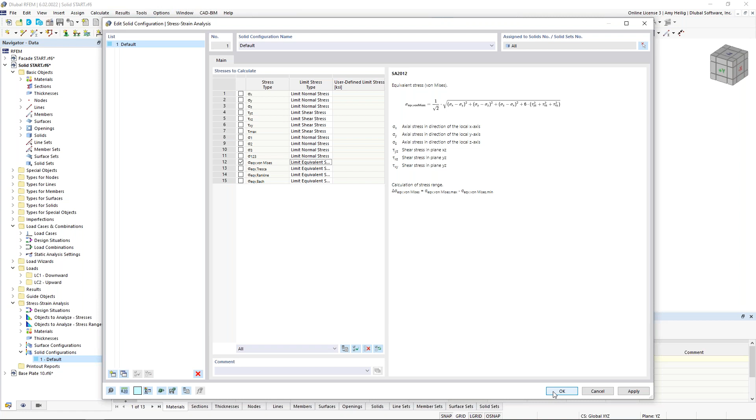Once we have set the configuration settings here, we can click OK. And under the stress strain analysis, we can take a look at the design situation as listed here, but under the objects to analyze, we don't want to design these surfaces. We'll actually just end up getting an error anyway that we can't design them because there's no thickness or material assigned to it, but we will design this solid. We also can activate that stress range if we'd like. And realistically, we can run our calculation. So we go to calculate, calculate all.

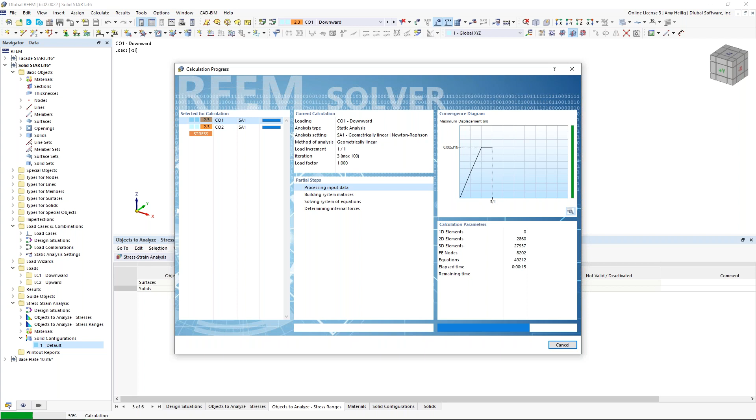So very similar workflow here for our 3D solid. We're going to essentially calculate the load combinations here. And then once the program is done doing this, it will move on to the stress design within that add-on. Now notice this does take a little bit longer because we've introduced FE elements now through the thickness of this object as well. But once we're done with the calculation, we're currently viewing the static analysis here.

We can take a look at our stresses, for example, such as the von Mises stresses. We see the von Mises stresses for that downward load as well as the upward load.

Jumping to the stress strain design, we can view the stresses on the solid. We see here the existing stress from the von Mises, our limit stress of 36 KSI, and the stress design ratio here of 0.865. We also can view those stress ranges on the solid: the minimum stress, the maximum stress, and the stress range.

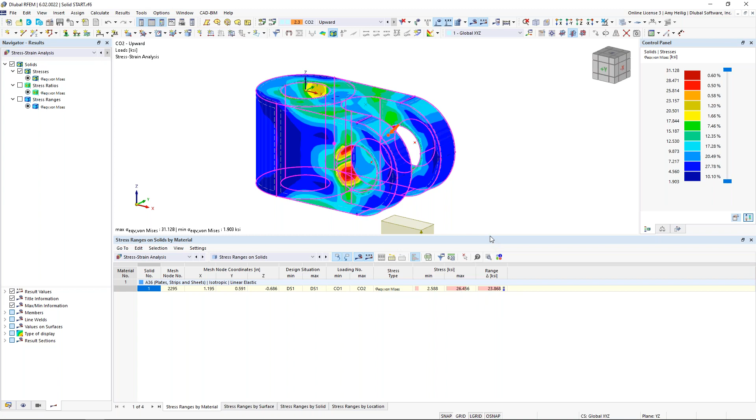Just a couple of quick features I wanted to point out with the solid element that are either new or improved within RFEM 6. If we go back to our navigator under the data, we have under the guide objects what's called clipping planes and clipping boxes. If we create a new clipping plane by double clicking here, we can create multiple clipping planes at angles.

We can define them by 3 points, or simply offset from the XYZ axes. Perhaps I set this parallel here to the YZ axes, and I can set my origin graphically by clicking within the model. I click OK and set.

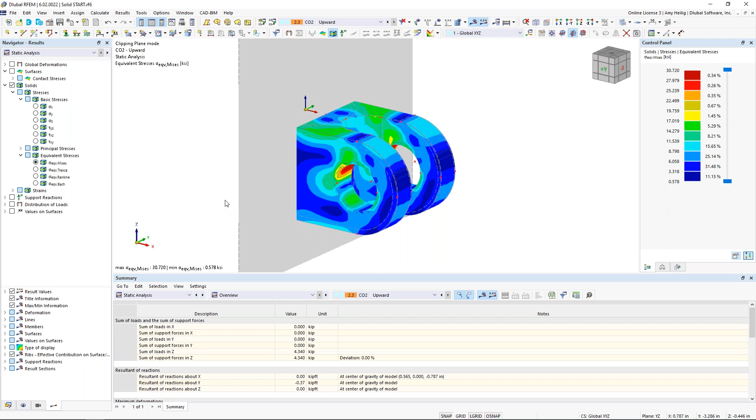Let me go back here to the static analysis, and we'll view our von Mises stresses. Notice you now can view those von Mises stresses throughout the depth of the element, or kind of in the interior of this solid.

We also can go back to that clipping plane. We can double click to edit it to invert it, so if we're interested in seeing the other side of those von Mises stresses. You can see that we can create multiple clipping planes, and we can simply turn them on or off by right clicking here and deactivating it. Now we're back to the full view.

Same concept for the clipping boxes. We can create a new clipping box here, and we set the origin. This time with the clipping box, we need to give it 3 dimensions, so we'll give it maybe 1 inch in the X direction, 1 inch in the Y, and 6 inches in the Z. I click OK and set active.

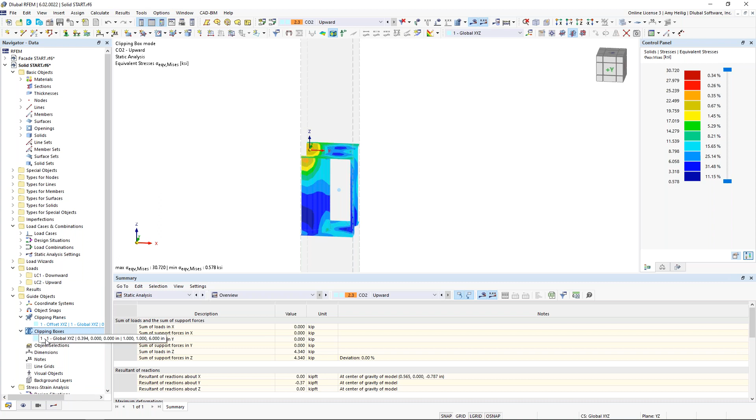Now we have this clipping box throughout the depth of that solid to view the stresses in the interior within these defined settings. Again, we can see the clipping boxes can create multiple definitions and can turn them on or off just by right clicking. So that's a little bit more efficient now in RFEM 6 for viewing various results with those solid elements.

Okay, so the final thing to touch on quickly, as I know we're running out of time, is just a very quick printout report. We can create a new printout report up here in my toolbar, or down here in our navigator. We create a new printout report definition here.

Notice the program gives us all of the various input as well as results that we can turn on and off. We also can load some saved templates here. We have default templates, including the stress strain analysis, where we've turned on some of the information we think you'd be interested in.

You can create your own template for the printout report. For today's quick example, I'll go ahead and uncheck everything here, and I can right click to collapse all these folders. We're only going to activate the basic objects. I'll activate my solid input data, for example, and then under the stress analysis, I'll input some of this input data as well as my results.

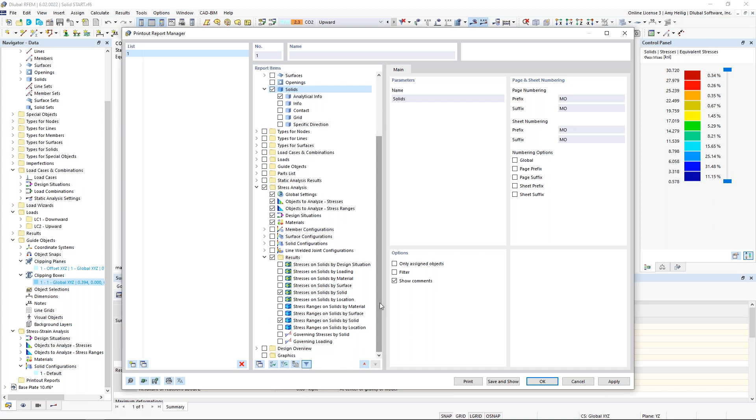We'll view here the stresses on solid as well as the stress ranges on solid. And I can simply click Save and Show. What the program will do is open up a separate application here for my printout report.

But what we can do is actually drag this printout report maybe to a second monitor and work concurrently within the RFEM program. Any modifications will actually update in the printout report in real time. Perhaps we'd like to add just one graphic to this printout report quickly, and currently I'm viewing my results here for this upward load.

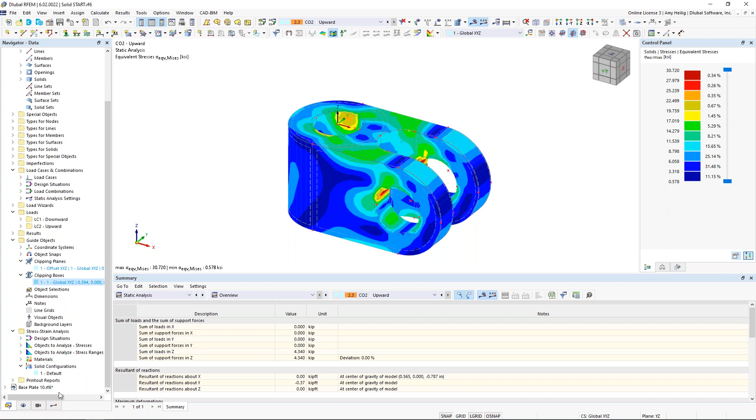And remember, we have this set at our von Mises. So I'm going to add this particular picture to the printout report.

We have a nice feature here under the display called isobands. This is new within RFEM 6, where we can activate what's called the gray zone. The gray zone allows me to set certain percentages of stresses that I'm not so interested in, so notice those low stresses are now grayed out. We can continue to increase this until we're content viewing only the stresses of interest, with everything else grayed out. So we're ready to add this graphic to our printout report.

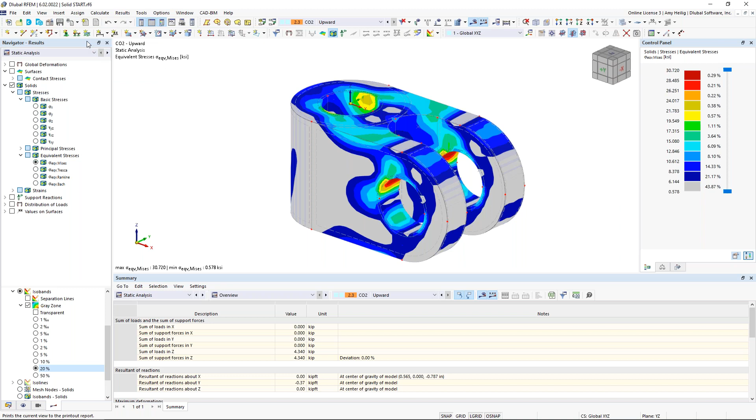So we can go up here to print the graphic to the printout report. We can also make some changes here. Notice this is set to window filling, so the picture is zoomed in to take up the entire page width. I'm also going to activate the 3D picture in the PDF option, which is currently off by default, but we'll go ahead and activate this.

If I click Save and Show, I'll drag my printout report back here, and we'll see this picture added to the printout report.

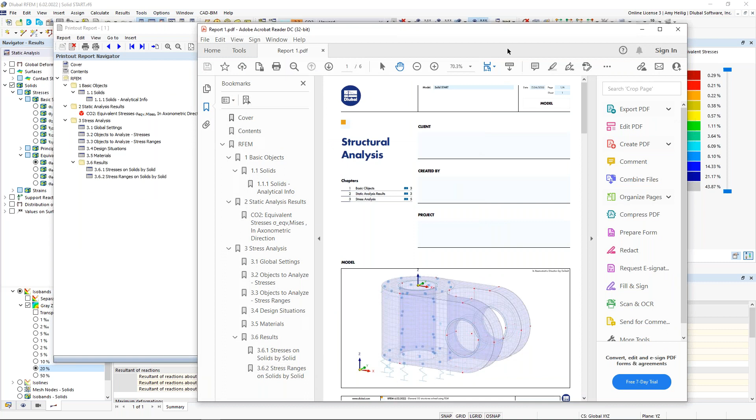Now, nothing seems so special about it now, but if we take this report and export it to a PDF, choose a location on our computer, and save it, the program will automatically launch whatever PDF application we're using. In my case, I'm using Adobe, and we see the same printout report. But scrolling down to that picture I just generated, you'll find that this is actually a 3D picture.

This is nice in the sense that within this PDF we have the ability to rotate and view those different stresses however we see fit. It'll be nice to send to clients, especially for objects where we don't want to create multiple printouts of different orientations of the stresses, but can instead just send them this 3D picture directly. So I just wanted to mention that's a nice feature within the program.